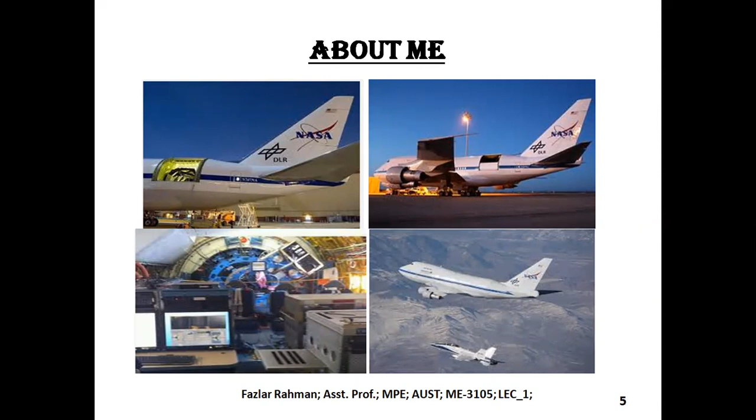Okay. At the end, you need to buy. But if you follow the class notes and you solve all the problems in the class notes, it will be enough for the class. But I always recommend and suggest you buy books. Sometimes I might give you a problem from another book. Okay.

Now, what is fluid mechanics, and why are we studying it? That we need to know. I think in 2.2 you had class one, engineering mechanics, right? Statics and dynamics. Yes, sir. Why do you study it? Anyone? As an engineer, why do you need statics and dynamics? Studying the forces acting on a body. Studying all the forces acting on a body to determine the velocity or acceleration. Okay, that's good, but why do you need to determine the velocity and all the forces?

One thing is that you need to make sure the body is stable and able to carry all the load or force on it. For example, you travel to Cox's Bazar or Sylhet with 10 of your friends, you get to the top of the hill and sit on a stone all together, but the stone is not rolling down, it's stable. So what is happening here? How many forces are working? The weight of the stone is one force, then the weight of all your friends. They are working at the same time, but the stone is not rolling, because the reaction force is working upward at the bottom of the stone.

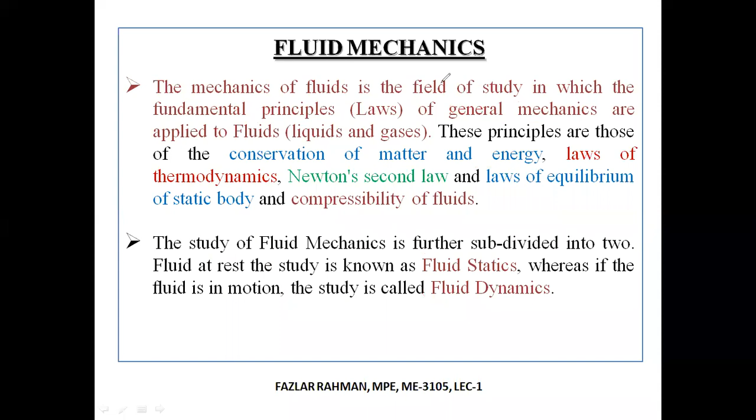Right over here, I'm just showing you some branches of mechanics. Sometimes people say continuous, or they use the word continuum mechanics. Continuum mechanics means the same mechanics that you apply to the two. If a mechanics deals with solid mechanics and fluid mechanics together, then it is called continuum or continuous mechanics. Then fluid mechanics has two types, fluid dynamics and fluid statics. Then it shows that under fluid dynamics is the stability problem, then you have turbulence, and you might have multi-phase flow.

Multi-phase flow means, say you are boiling water in a pot. There will be two types of flow. After you turn on your stove, at first you see liquid moving in the pot. Then it generates steam, and steam also flows from the top surface of the water, right? That means right here there are two types of flow. That is called multi-phase flow. Okay. Just to give you an idea: we will study only this one, but still, see, there is a huge branch of fluid mechanics, fluid dynamics, multi-phase flow that you can study when you'd like to do a PhD or master's. Okay.

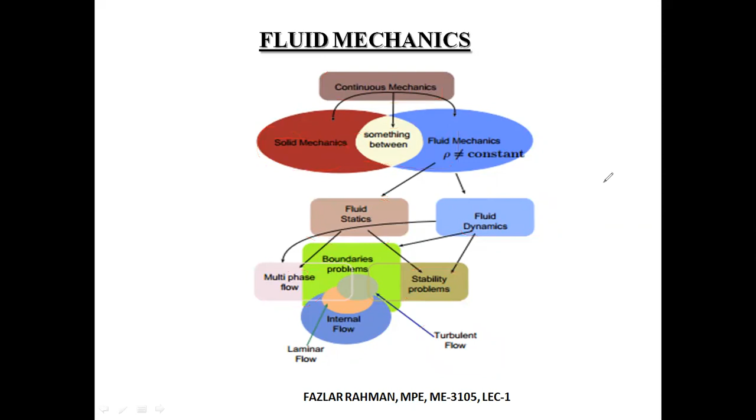Now, how did fluid mechanics develop? Did this come automatically into our hands? No, right? From the ancient period, people were living in caves. But to survive, they needed water. To get food, they needed to hunt animals, either by arrow. And to move from one place to another or to cross the river, they needed something. So what did they develop? They developed a raft, then they developed a boat.

And gradually over time, they gained some knowledge: they found some trees or plants around their home and got some fruit. Then they thought about farming and irrigation. And from that point, the concept of fluid mechanics gradually developed. So they have farming land, they farm the crops, but they need water. And water is 30 feet away from the land. How can they bring it?

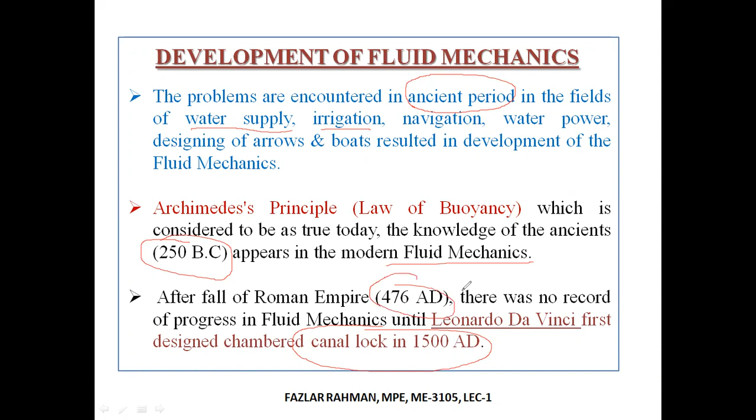Then Leonardo da Vinci at first designed a canal lock: you have a canal, how can we stop the flow in the canal? You need to make sure that if you put a barrier or a lock, meaning a plate, it has enough thickness or is strong enough that it will not break down due to the pressure of the water. So you see, that was a long time ago, more than 500 years ago. So what I'd like to say is that from the beginning, fluid mechanics gradually developed.

Then there are other scientists like Euler. Then we have Isaac Newton. Then Bernoulli; we have Bernoulli's equation you will study. Then you know the name Ernst Mach; the Mach number we study comes from here. Then Navier and Stokes. These two scientists together developed the equation called the Navier-Stokes equation, and it's widely used. With that equation, you can solve any problem in fluid mechanics. And a lot of software like ANSYS that solves fluid mechanics problems comes from the Navier-Stokes equation.

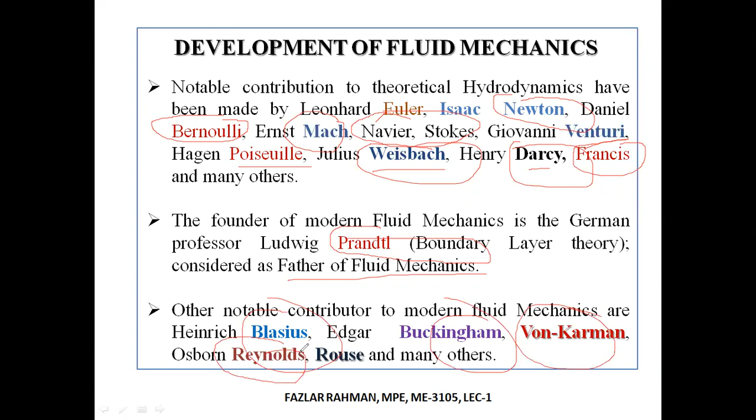Okay. Then Venturi, then Poiseuille, Weisbach, Darcy, then Francis, and we have a turbine with his name, called the Francis turbine. Darcy and Weisbach together derived equations that we are still using. And Prandtl, a scientist from Germany, we call him the father of fluid mechanics because he gave the modern theory called boundary layer theory. Then there are other people like Blasius, Buckingham, von Karman, Reynolds. You will see in fluid mechanics we study the Reynolds number. So they have significant contributions in fluid mechanics.

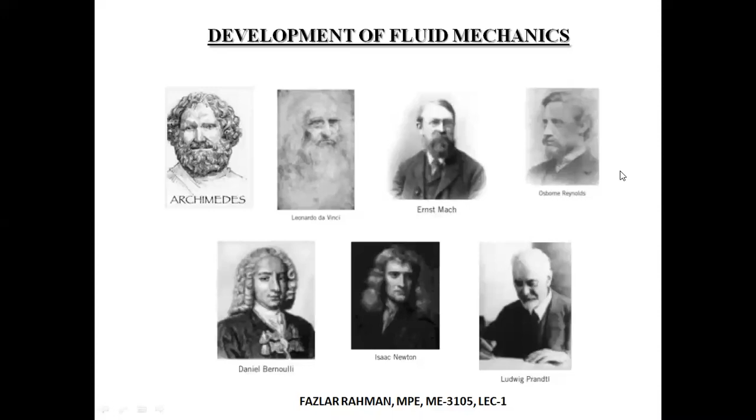And here are some pictures right over here. It's good to know how they look, and from the figure you'll realize their background. They're coming from Western countries, from different ethnic groups. Okay.

Now, what will be the use of fluid mechanics? That is called the scope of fluid mechanics. It is the study of fluid at rest or in motion, meaning static fluid or dynamic fluid. If you have knowledge in fluid mechanics, you can apply that knowledge in the design of canals, levees, and dams. Another thing, even though we are sitting on a chair, we are surrounded by fluid. If you'd like to design an efficient ceiling fan, you need knowledge of fluid mechanics.

You design an airplane. You design a ship. You design a pump, a compressor. Even if you'd like to design a boiler, or a pipeline. So say you are working in an oil company. They'd like to deliver crude oil from Chittagong port to Comilla, and you need to design the pipeline. So you need to have knowledge of fluid mechanics.

Then the air conditioning system; there is a fluid we use in the air conditioning system. So we need to know what type of fluid is there, when this fluid will boil or become vapor, when it becomes liquid, and how much heat will be transferred from the particular fluid. So in the air conditioning system, you need to know the mechanics of fluid.

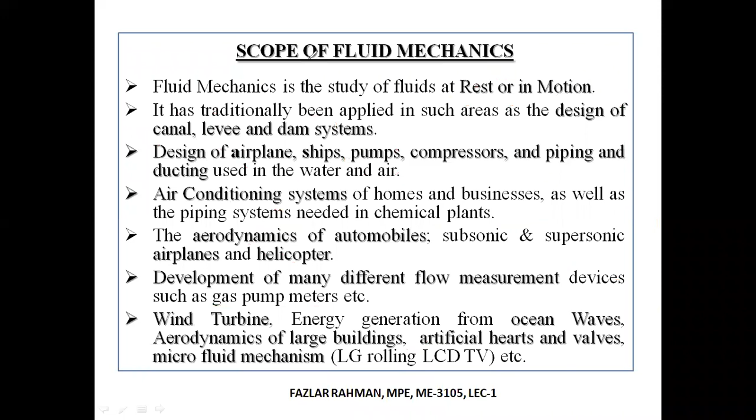Another thing, in medical science you need to know fluid mechanics because the maximum part of our body, 2/3, is fluid, right? So say you'd like to design or develop a medicine for heart disease. You need to make sure that your fluid or your medicine will not affect the blood, or you'd like to figure out what the effect of your medicine will be on the blood flow. So blood itself is a fluid.

And sometimes there are some surgeries, right? If you have a heart blockage, how do they do it? They insert something through the blood channel, right? And it goes to the heart and they break the blockage. So in that case also, they need knowledge of fluid mechanics, the properties of the fluid, that is the blood.

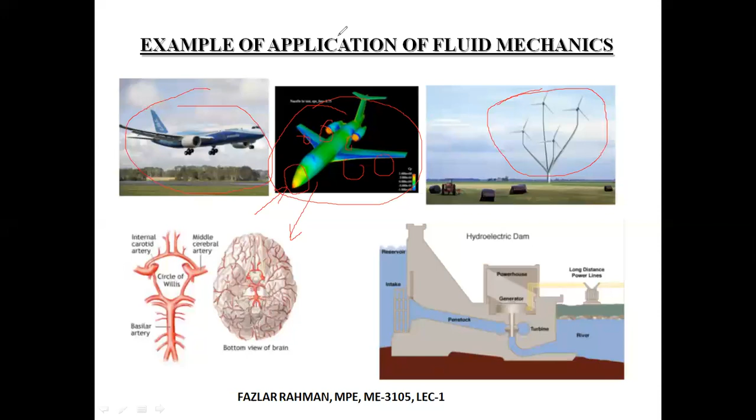So are you able to follow me? Hello? Yes, sir. Okay.

If you visit our fluid mechanics lab, you will see we have a wind tunnel. In the wind tunnel, you put in this small model of an aircraft or fighter plane, then hook it up with some sensor, and air is flowing. Say this aircraft right over here is on a stand. This is not the real aircraft, it's a model, and air is flowing from the front section. Then there is a sensor. The sensor will tell you how much force is working.

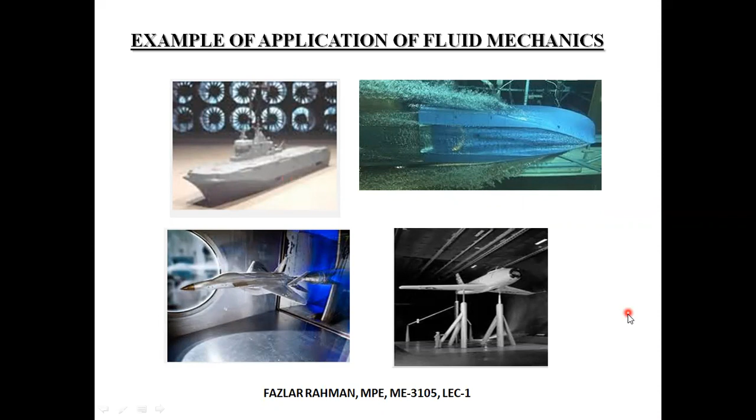Now you need to know what a fluid is, because we are talking about fluid, right? For example, you'd like to buy a computer, then what do you need to know?

Sir, sharing may be stopped. Sharing or recording? No, recording is on, is still on.

So if you'd like to buy a computer, you need to know what a computer is. You need to know what a CPU is, what RAM is, what a hard drive is, what a USB port is. If you don't know anything, then you cannot buy the proper computer from the store, right? So to study fluid mechanics, we need to know what a fluid is and what its properties are. You need to know some definitions and some terms.

Then you need to figure out some other things, some equations or some derivations, and you need to know how you can solve certain problems. For example, you'd like to design a dam. If you see how all dams look, the top is narrow, the bottom is wide, but why? It comes from the laws of fluid mechanics, because at the bottom pressure is high, at the top pressure is low.

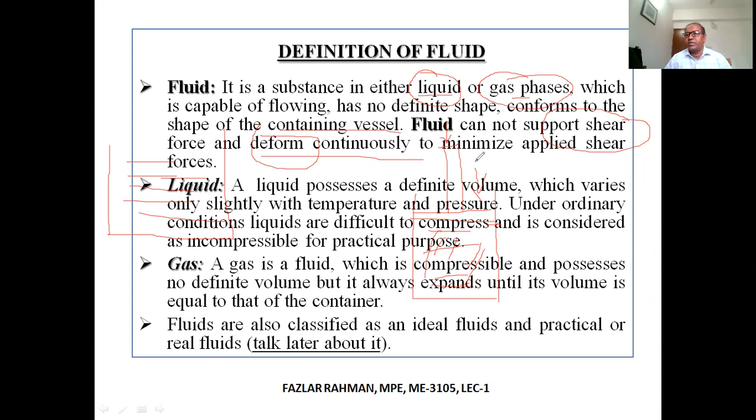But the same cylinder, if it is filled with nitrogen gas or oxygen gas or air, you are able to squeeze it by applying a bigger force on top of the piston. So a liquid is normally incompressible. And gas is a fluid which is compressible and possesses no definite volume, but it always expands until its volume is equal to the container.

For example, you are sitting in a room right now. Your room is full of air, right? So if I close all the windows, all the doors, seal it tightly, then take out all the air, there will be no fluid inside the room. Now you put just 1 gram of oxygen or 1 cc of oxygen in that room. What will happen? The distance between one oxygen molecule and the other will be increased. They will gradually expand and occupy the whole room.

Even if you put 1 pound of oxygen in the room, all the oxygen will expand and fill every space of the room. So that is one important property of gases. And inside the fluid, normally you cannot see any vacuum unless you have some bubble. A bubble is also filled with air, right? So it says that gas is compressible and it will occupy all the space of the container, and it doesn't have any finite or fixed shape or volume.

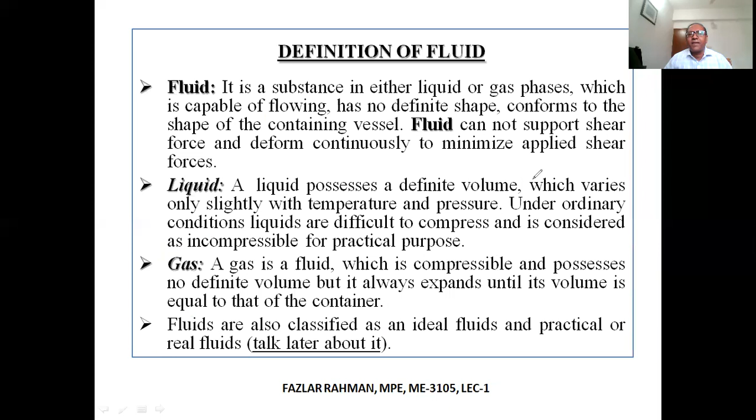Anyone? Sir, fluid cannot support shear force and deforms continuously. This point is not clear, sir. Not clear. Okay. Deform continuously.

For example, look at the river. In the river, what happens? Water is flowing downward, right? And especially if you see the river in the rainy season, you'll see the height of the water in the river is not the same in all places. The height of the waves, all the waves are not the same.

Again, you have a bucket of water, then put your hand in and try to move. What will happen? Tell your younger brother or sister to move their hand inside the water. They are able to do it, right? But if they put their hand in the water and do like that, what will happen? When they take it out, the water will rotate, right?

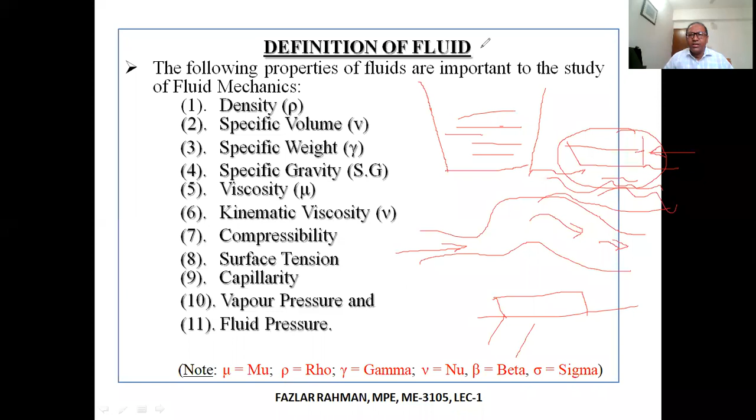And we'll discuss later on. We'll derive an equation for how we can figure out the shear force from a liquid. But you need to know what shear force is. Shear force works parallel to the surface. For example, say you have a table. The table has a glass on the top. You put your hand on the glass and try to move. You can move easily, right? Because the glass surface is smooth, it doesn't have that much shear stress.

But take out the glass. Say you have a wooden surface, a little bit rough, try to move your hand. Obviously, you can move it, but you need a little bit higher force. So that is an example of shear force, but shear force always works parallel to the surface, parallel to a plane. Okay.

I am giving the lecture in English, so are you feeling any problem understanding? Anyone? Is it okay? You can follow?